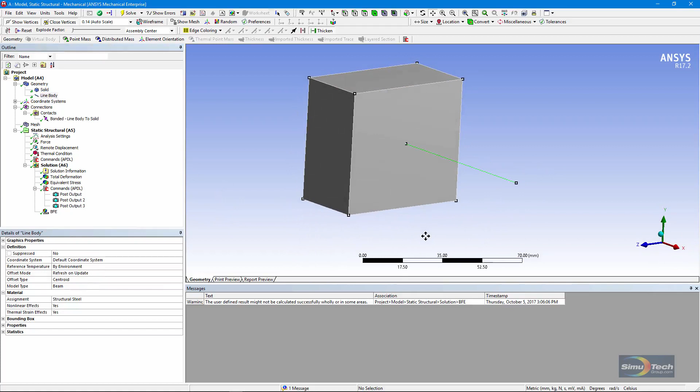We have a solid body here, and a line body moved right up against it. The two are not sharing any nodes. They're currently unaware of each other.

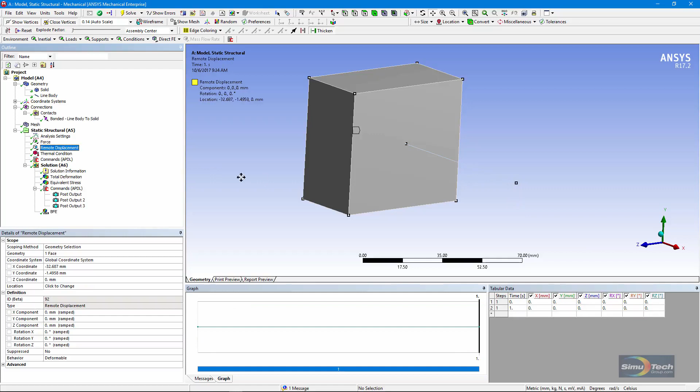We set up some simple forces and other loads on the model. We have a force out here on the tip of this line body, and a remote displacement applied to the back of this solid body.

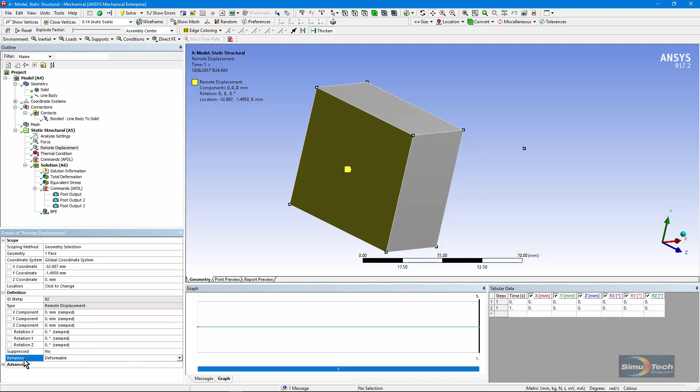The remote displacement, note down here, has been set as deformable. That means it can thermally expand. However, on average it's going to be prevented against movement, and you can see that we've set no movement in X, Y, Z, and no rotations X, Y, Z. So it's held in space, but with this deformable behavior, it can thermally expand.

Now, we have a thermal condition applied. We've put a 200-degree temperature in the solid body, but we have not applied it to the line body.

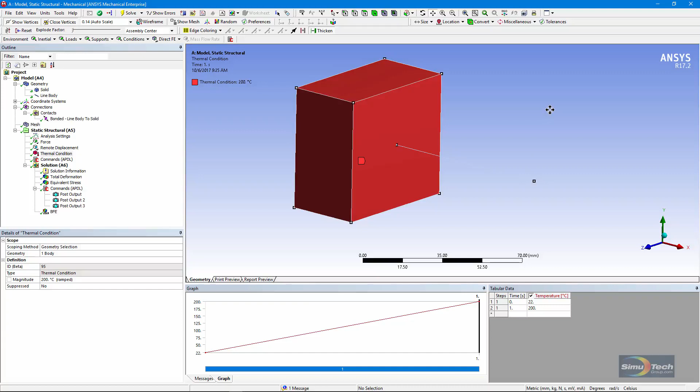With ordinary connections between a solid body and a line body like this, if for example we used a fixed joint, that temperature difference would not result in any thermal stresses.

Now, let's go look at our contacts. There's just one, a bonded contact with the target as a face on the solid, and the contact as the vertex at the end of the line body.

The formulation chosen here is beam. There are others. Some won't work with a line body to solid body connection, but beam will.

What it's going to do is actually create a little spider web of small beams. It's reminiscent of the beam spiders used in finite element analysis decades ago. That small spider web of beams will attach the node at the vertex on this line body to nearby nodes on the solid body.

When we specify a beam connection, what we're doing is getting beam 188 elements with a circular cross-section, and we're setting a radius value.

We're also choosing the material, and that's from the materials available in your model. So it could be the same material as what's been used for these bodies in this simple model that offers only the structural steel. We set the radius.

We don't get any view of what's going on. Let's go back to the mesh. How many nodes here are going to be attached to the end node on this beam by that little spider web of beam elements? That can be controlled with this trim tolerance number, and we've put in 10 millimeters.

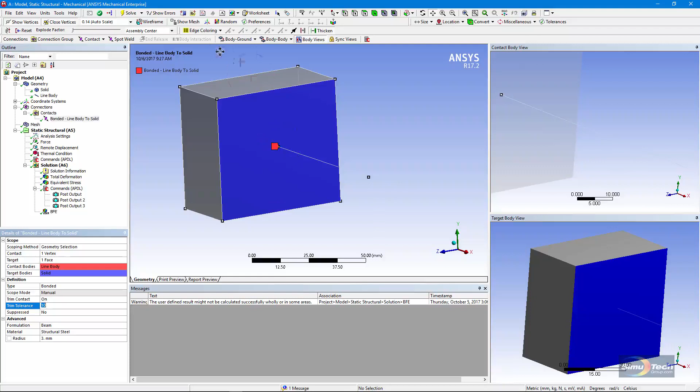Let's turn the mesh on. It gives you an idea that we're going to capture just a few nodes. We might make that 10 value something bigger, but let's look at what happens.

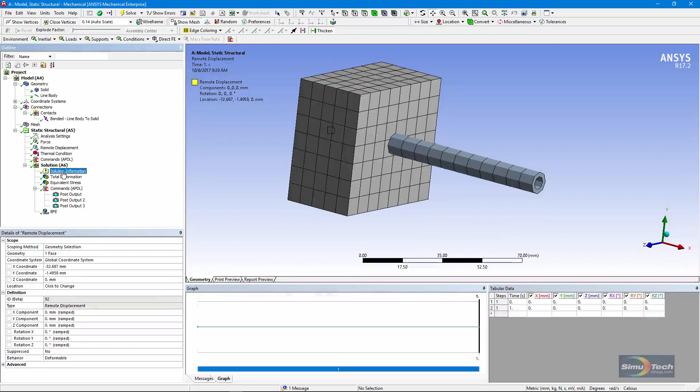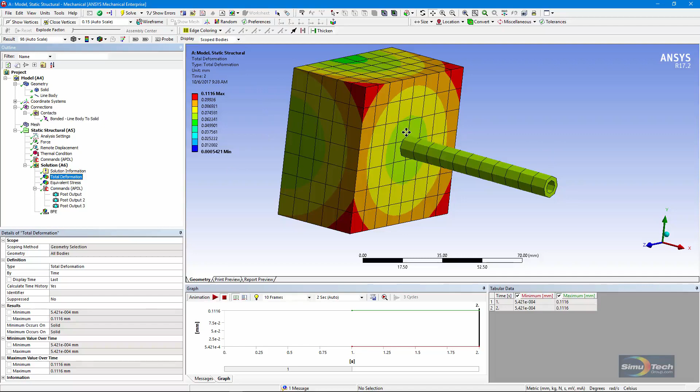If we solve, there's our deformation, and we're getting thermal expansion in here, not just deflection due to that force. So most of what you're seeing in this example is thermal expansion, centered on the remote point here that controls the back face.

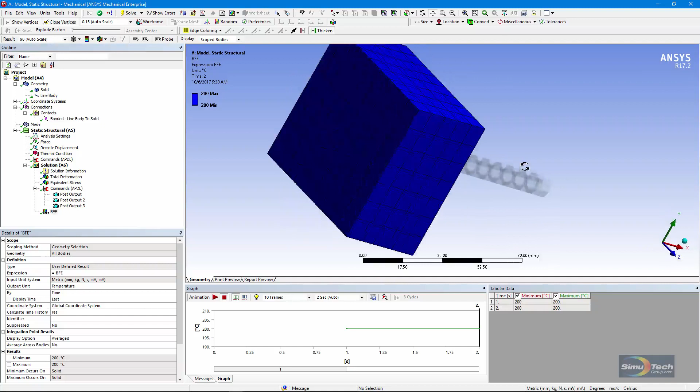Here's a plot, a user-defined result. We put in BFE and that gives us temperatures. We can see the 200-degree temperature applied to the solid body. It does not give us any information on what's going on in beam elements. It's a restriction on user-defined results.

Now we've put in some APDL commands. Let me blow them up. I turn on the ability to output graphic images. I set up a view. I show the element cross-sections. And I turn on contour coloring according to applied temperatures. Then I plot the elements.

I also execute a solve command. I do that—you would not normally do this—but I do it in order to get the temperatures visible in this element plot. The reason I do that is that the temperatures are being applied by a table array, and it's not normally evaluated until a solve takes place. This will be followed by a second solve using the same loads, which wastes time and storage, but I'm trying to show you something here.

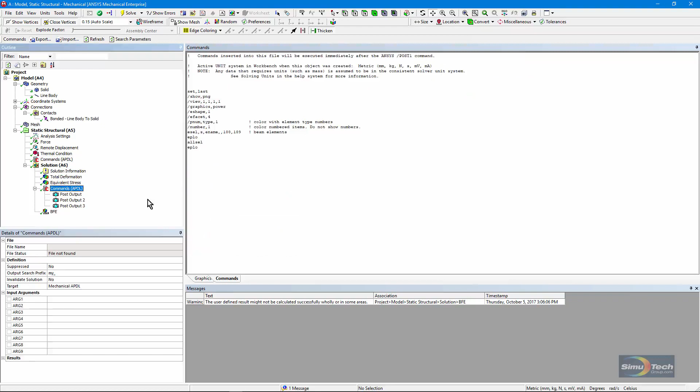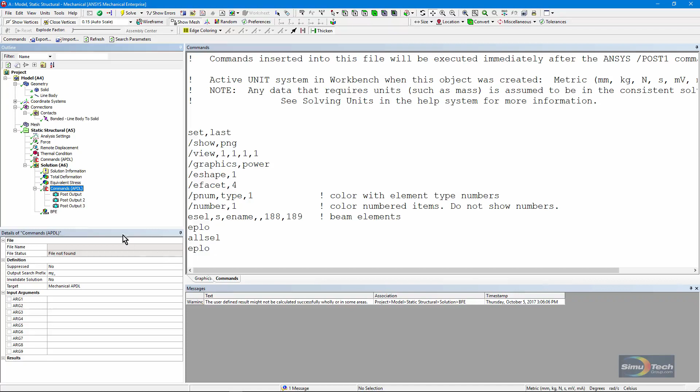This plot will be visible down in the post-processing area if other APDL commands have been entered. So we go down below and we see some more APDL commands. We make sure that we're showing graphics in the same way. We color now with element type numbers and select only the beam elements and plot. Then we select everything and we do a plot. This gives us our second two plots here. The first one comes from these APDL commands.

Let's go see the result. There's our plot of temperatures. You'll notice that the solid body is at 200 degrees, while the ambient temperature exists out here in the line body. And look at the rainbow coloring in here. This is the beam spiderweb, and those temperatures are transitioning from 200 down to the 22-degree temperature in the line body. These temperatures have been applied to nodes.

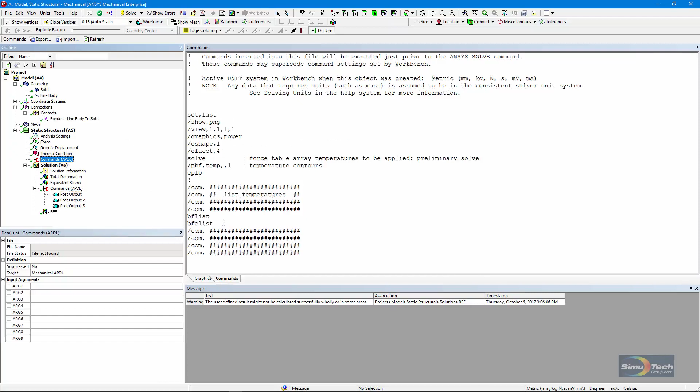And in here, I put in a BFLIST and a BFELIST command to examine how temperatures have been applied to this model. If I go into Solution Information and scroll down, here we are. This is where the listing of temperatures starts. You'll notice it's being put in at the node level. I scroll way down to where the listing of applied temperatures ends, and it notes that there are no element body forces to list. So no BFE commands were actually used in the background APDL batch run for this model.

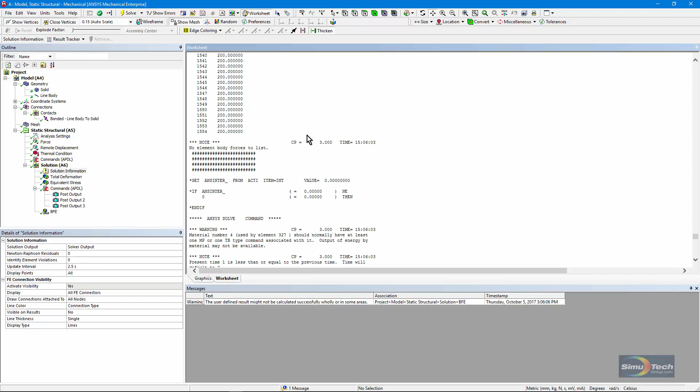It was all done at the node level, and that's why temperatures changed from one end to the other end of these little beams used at the beam spiderweb that connects things together.

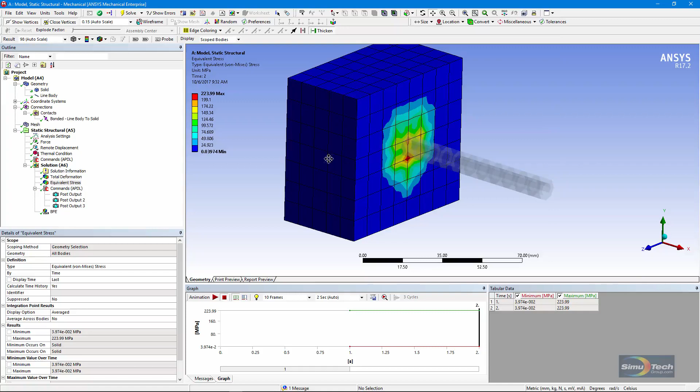Now, these stresses are not being caused much by the force on the end. These stresses are a result of the beam spiderweb not thermally expanding as much as the solid block. Here we see the beam elements in the model, and here we see the entire model, now with the temperatures not shown. We're simply coloring these elements according to element type. So there's a rapid once-over on the use of beam elements.

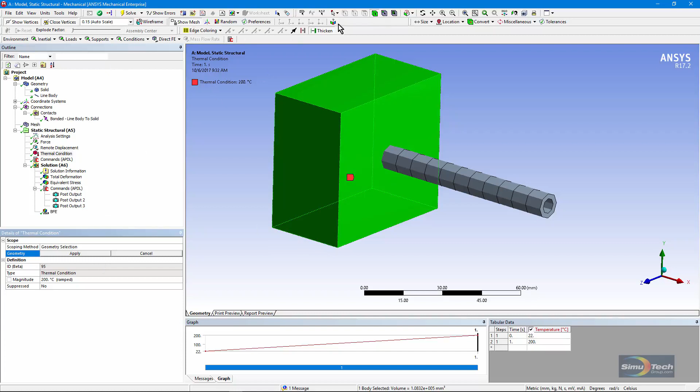If I was to apply this thermal condition to both bodies, let's just do that for the purpose of illustration. I want to select a body, click there. Now both bodies are receiving that higher temperature. Let's solve this model.

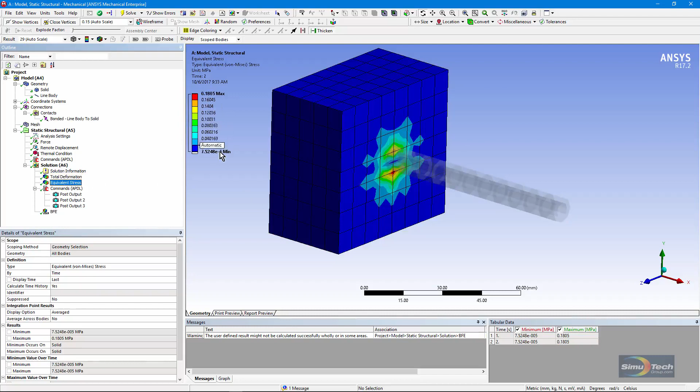There's our deformation. It's still a lot of thermal deformation. Here's the state of stresses. You'll notice the stresses are very small now. They're not being caused by a difference in temperatures. And you can see that everything is colored red in here. All these bodies are at 200 degrees. We don't see any blues.

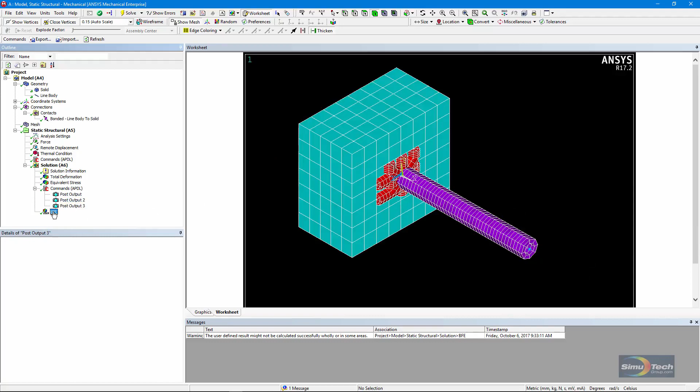And as before, there are the beam elements. And there are all the elements, with their cross-sections thickened for viewing. Here we still see the 200 degrees. This user-defined result simply doesn't show the temperatures out here in the beam.

So I hope that's been instructive. This method of connecting things together with the beam formulation is sometimes useful. Conceptually, it's easy to see what's happening. You do need to assign a material and put a radius on these little beam spider elements. You only get to see them in a plot like this to see what the cross-sections look like.

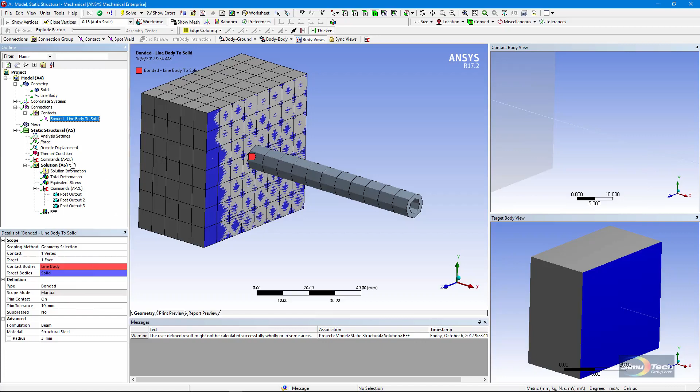And the other thing to be aware of is you do control how far out those beam elements go on the face by putting in a trim tolerance. Set up trim contact on, put in a tolerance value, look at the size of the circle and decide if it's big enough. Change the number if you like, and you might put in APDL commands like these from here down to here to give you an idea what's going on in a plot like this.